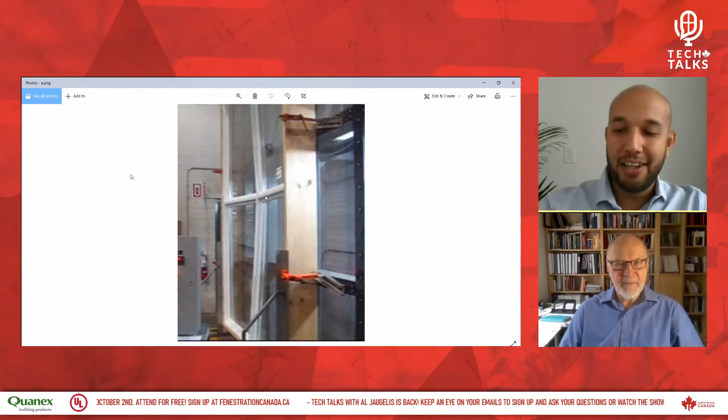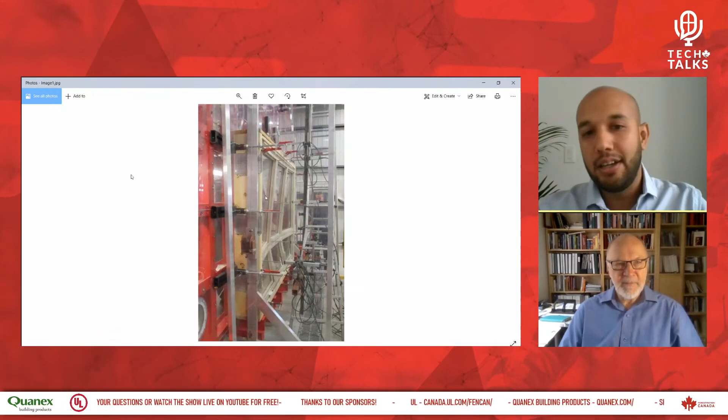So we'll start with this combination. As you can see, the bending in the middle — if you're sitting at home and you see your window bending like that, you won't be happy, you'll actually be scared to sit at home. This is the product Dave showed last week, and as you can see, the combination has the same bending.

So Tarek, would these be reinforced or unreinforced mullions? Well, these are unreinforced mullions, and as you can see the deflection is huge. Even with reinforcement, depending on the design pressure, it changes all the time — the deflection, the type of reinforcement gives us different deflections. There's wood reinforcement, aluminum reinforcement, steel reinforcement, it depends on the manufacturer. Different steel reinforcement gives different design pressures and deflections. The majority of these are not reinforced, and that's why we see the huge deflection here.

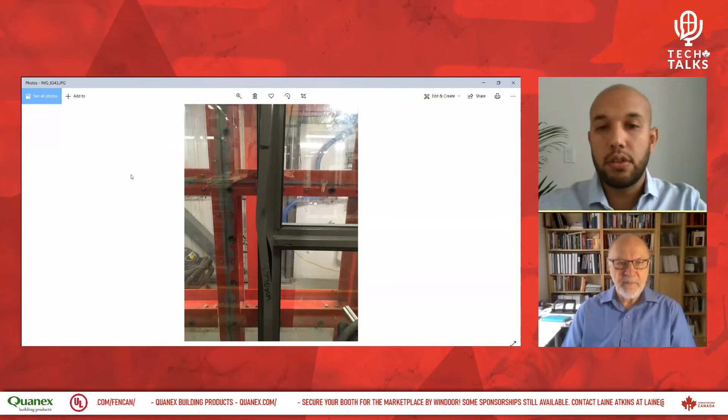Here, it wasn't the mullion specifically — it was the intersection of the horizontal mullion with the frame that caused the product to completely fail, and the frame itself to fail, which is interesting. It's not just the mullion that can fail, it's also the product itself. The frame surrounding the product can fail, since this is considered the weak area in the product.

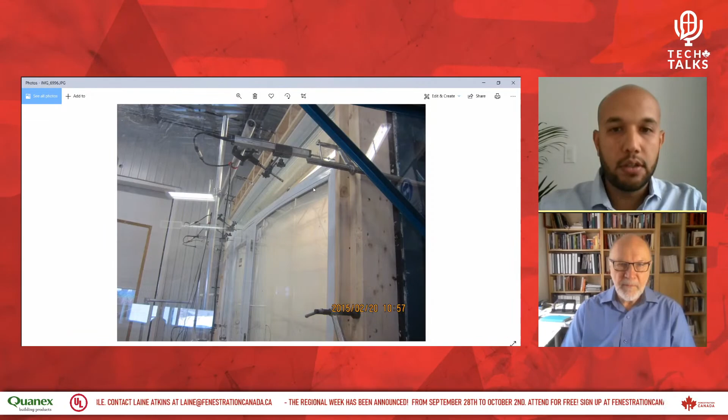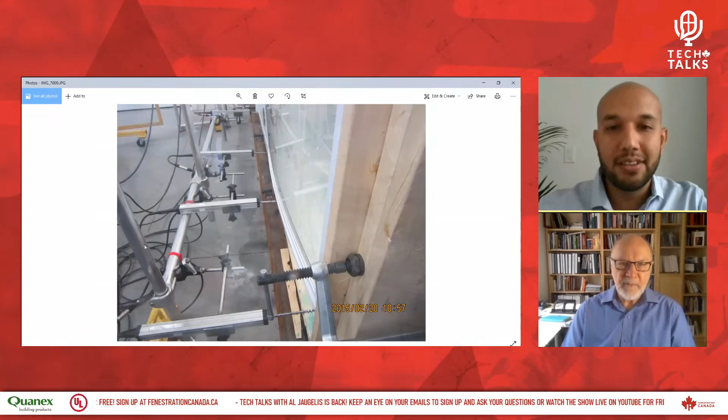This is another combination with a transom, a door, and a fixed unit, and you see big deflection there. The glass bends, everything bends, it's like a balloon. I think anyone with an engineering background looks at that window and says, that horizontal element, that big transom, is going to be a problem, right?

Yeah, well, you can always include and test it, and we'll see that when you test the biggest size, it covers the smaller size. So if we get the value for the biggest size, even if it deflects a lot like that, you can still have tables for R and LC classes. We create the CW classes table for the same product, and we can also create the R and LC class tables. So you get both.

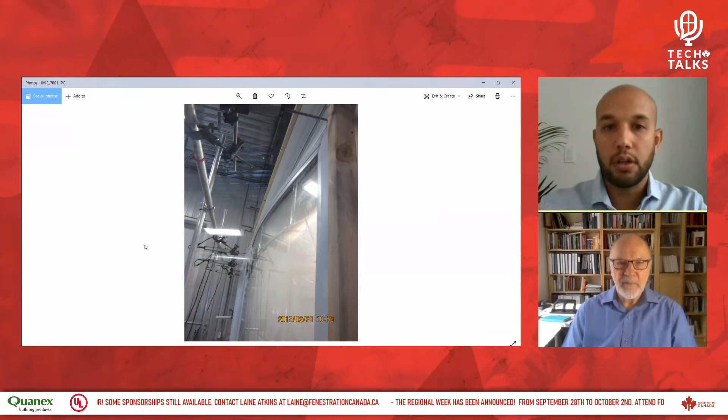Yes, you test a big product, and it has a huge deflection like that, but by testing this big product, as we can see here, it covers all the smaller sizes, which is very good since you don't have to test each and every type of product or each and every size.

With this combination, we'll cover that during the grouping for sure, but we can cover the horizontal mullion separately, and we can cover the product for the vertical mullion. So in the calculation, we take the deflection and everything from this test and transfer it as if the product was tested just with a vertical mullion. This way you don't have to test a separate product. For sure the deflection is higher when you have a transom, but you don't have to retest and do different testing. So I'll stop sharing, Stefan.

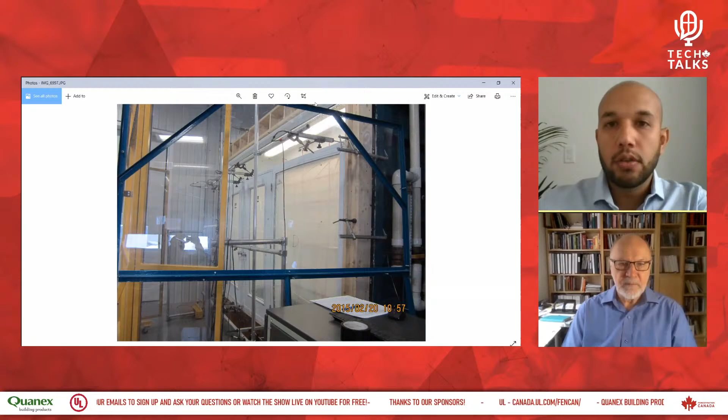So these are some of the pictures that we see a lot in the lab. There's for sure patio doors that bend a lot like that, and it's pretty interesting to see how products push the limit of the products. We usually go until failure just to make sure to know exactly the design pressure of the product, which is pretty interesting.

It's a good thing to see, and it's a nice show for the client to watch. But it's pretty annoying to clean the glass when it breaks after. That's the annoying part for sure, but it's pretty good for the client to know the limits of their products, not just stop at a specific design pressure, because you never know when the product will break. Testing shows you that for sure.

And I think that's one of the reasons that we test products, because especially with the lighter weight products, the R and LC class products that don't have much reinforcing, or sometimes no reinforcing, you can't really determine the strength of the product on the basis of engineering, right?

Yeah, there are so many indeterminates. There's the deflection of members, how the glazing beads hold the glass. If the product deflects more than L over 175, then you really don't know what the limit is, right? And you also don't know what the weak point is. So sometimes you have a window that looks like it's very strong, but it fails in a joint, for example, or a glazing bead comes off, right?

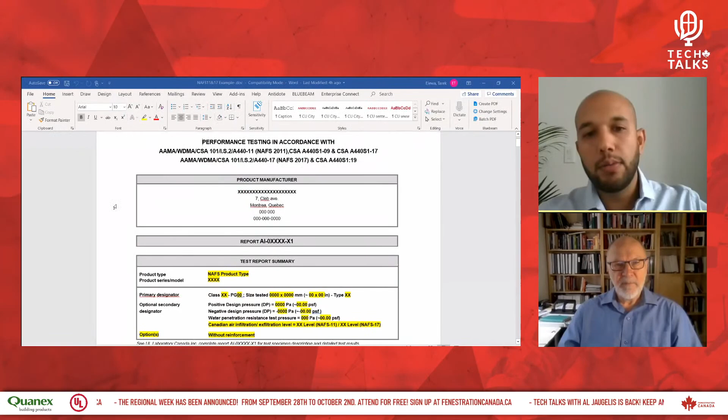Sure. First, I'll share my screen, Stefan, to show a sample report. So I created a report sample of NAFS in general. In our reports, we have the address of the manufacturer for sure, then the product type, NAFS product type, where here we have a combination. If it's an operable with a fixed, the operable always governs as a product type. If we have two operables, the biggest operable governs as a product type for NAFS.

Then we have the primary designator with the class R, LC, CW, or AW, with the PG, the size tested, and the product type. Then we have the structural level, the water level, and the air level. If there are different options with reinforcement and without reinforcement, the table is expanded, and we have two primary designators, or two options, one with reinforcement and one without reinforcement.

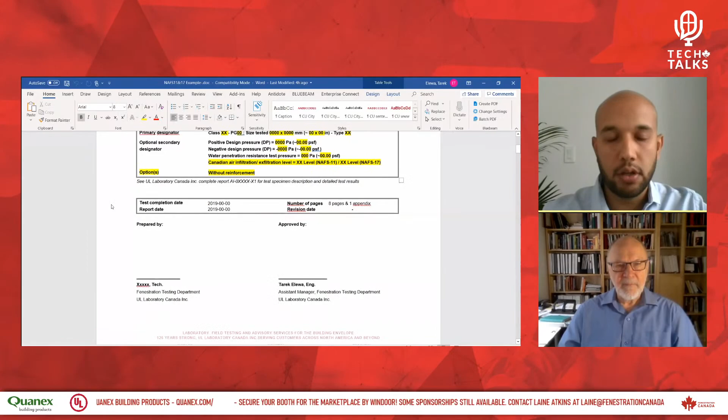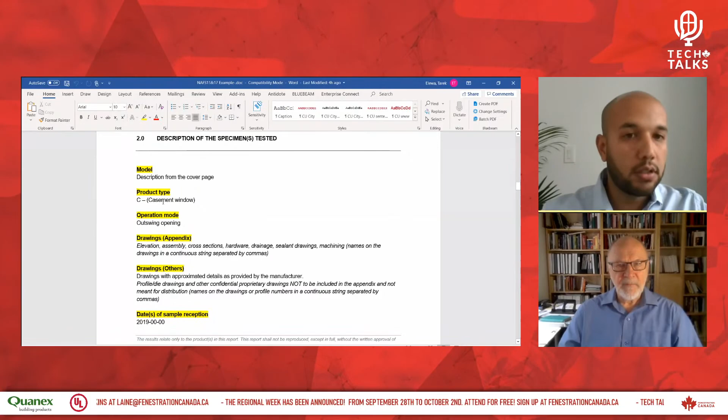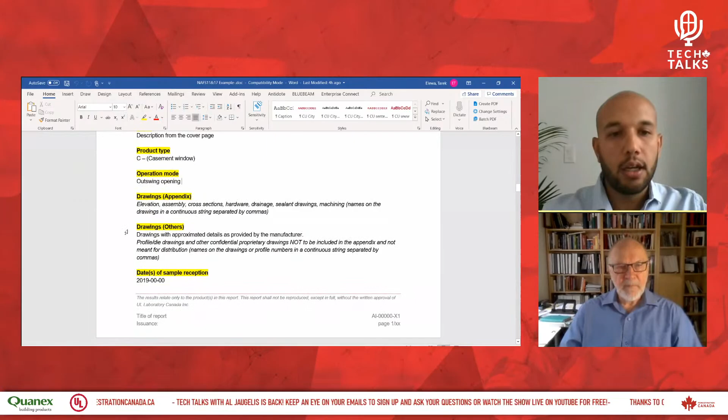When describing the specimen, we add the model. Let's say if it's a fixed and a casement, then the product type is casement. Is it operable, outswing or inswing? We add all the drawings needed. Then we note the date of sample receipt and the date of testing. If it took 1 day or 10 days of testing, we write the specific number of days.

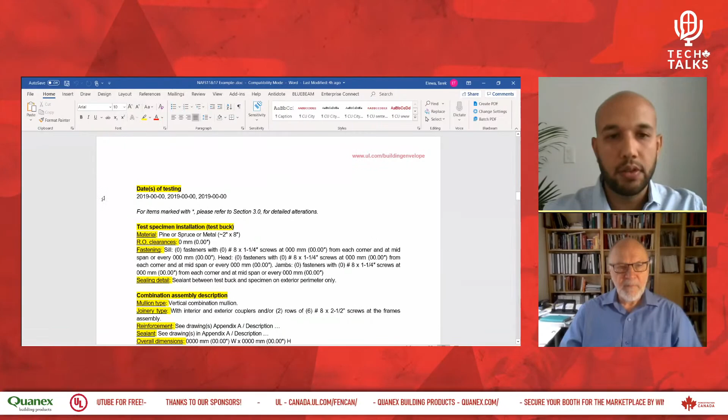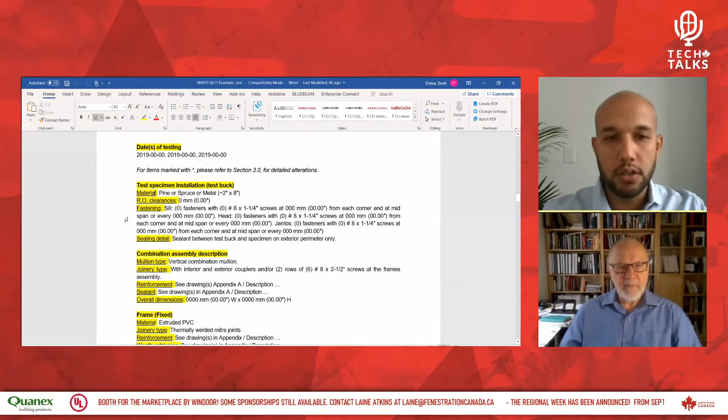Here, if there's any modification to the product, it's marked, and we identify what the changes were later. This part is very important.

It's the anchoring of the product. We have to explain exactly how the product was anchored, and it makes a huge difference. Is it anchored to a metal test buck or a wooden test buck? If it's a wooden test buck, how big was it? The gap between the product and the wooden test buck, the fasteners, how many screws, and where they are installed exactly. All this information is very, very important, since the weakest also covers the strongest.

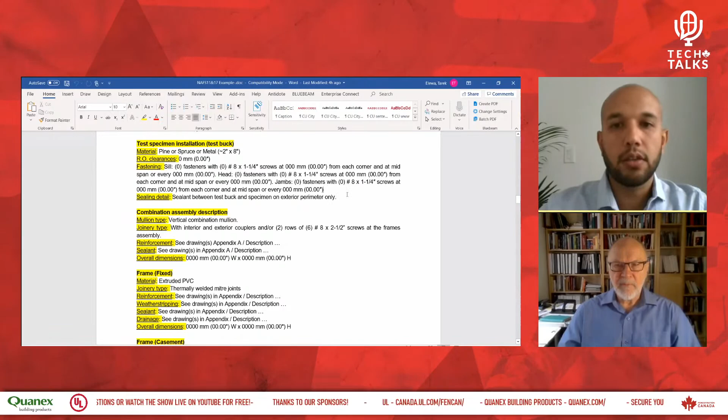For the fasteners, you can certainly do calculations if you want anchors in the future, but as a lab, we stick to what is tested. We personally cannot calculate the anchors, but we always take the weakest scenario, and this is described here.

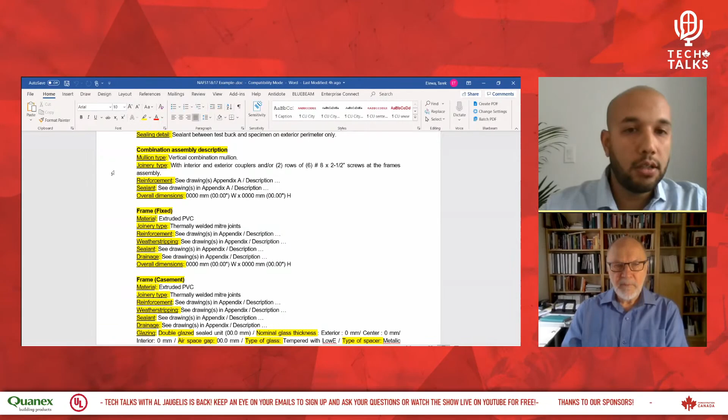Then the combination assembly description, we describe how it is combined together, if there's couplers, how many screws, attaching the product together, attaching the mullion, if there's reinforcement, what type of reinforcement. If there's drawings, that would be even better, we describe it. If there's sealant, we describe the sealant, and we put the overall dimension of the product.

After that, we describe each frame separately. I kept as our example a fixed and a casement. For the fixed, we see here there's a missing section, but it won't change much for our presentation. For a fixed, we describe the material—is it PVC, aluminum—how it's joined together, if there's reinforcement of the frame itself, the weather stripping, the sealant, the drainage, and for sure the glazing.

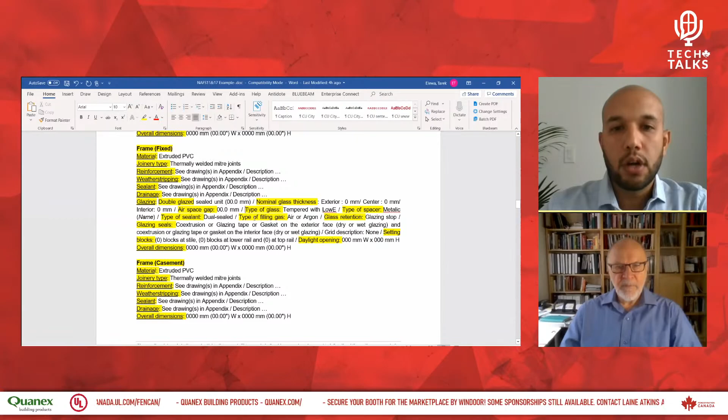So this is what I wanted to do—I'll put the glazing here, because with the fixed, we go through the glazing. The frame, the glass is always attached to the frame right away. So we describe the glazing: the thickness of the glass, the air space, the type of glass, if it's tempered or annealed, it makes a huge difference. Again, the weakest glass covers the strongest glass, and the smaller thickness covers the bigger ones. So we describe the filling of the gas, the retention, and we go through the glazing in general.

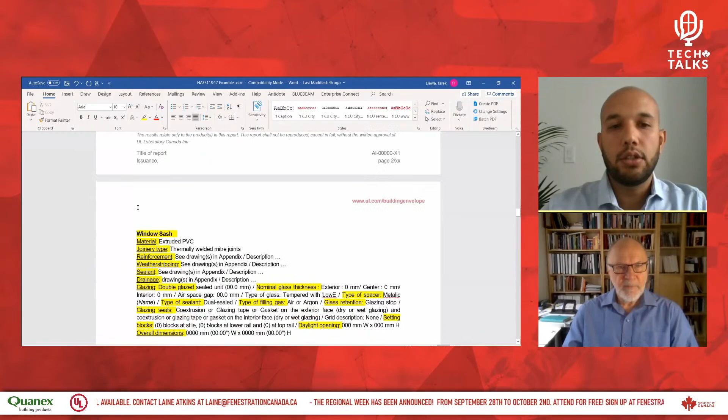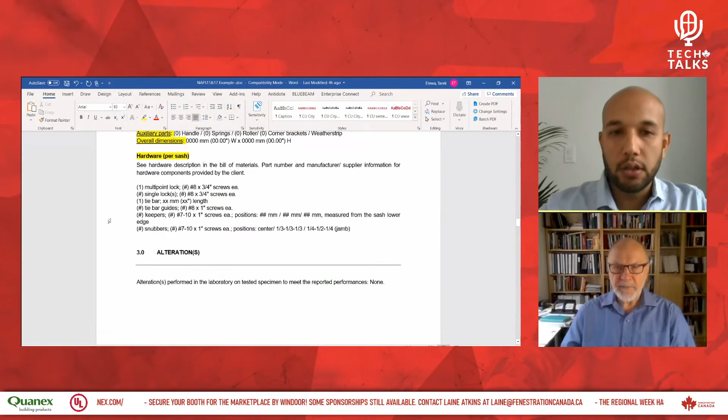We describe each frame separately and then each sash separately. The hardware is very important for each product—where the hardware is located, what type of hardware is used, the manufacturer, and the series of this hardware. All of this makes a huge impact on the product, so we have to describe it in detail. We usually get a bill of material with the description of all the products, their manufacturers, and the serial number of the hardware, and everything is included in the report.

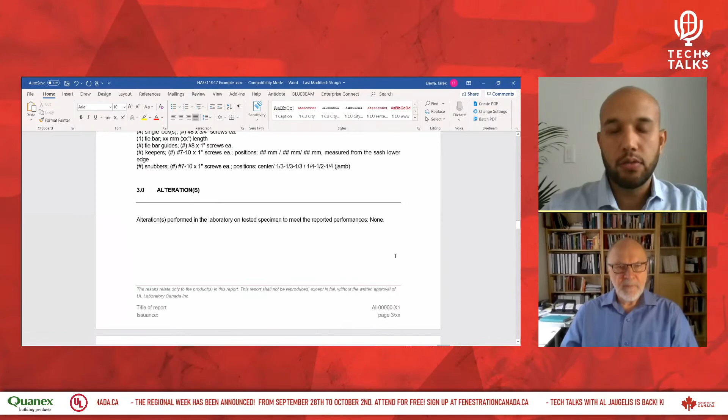As I mentioned, the alteration section—we usually write down if keepers were changed, sealant was added, and everything is mentioned there. Then we come to the results.

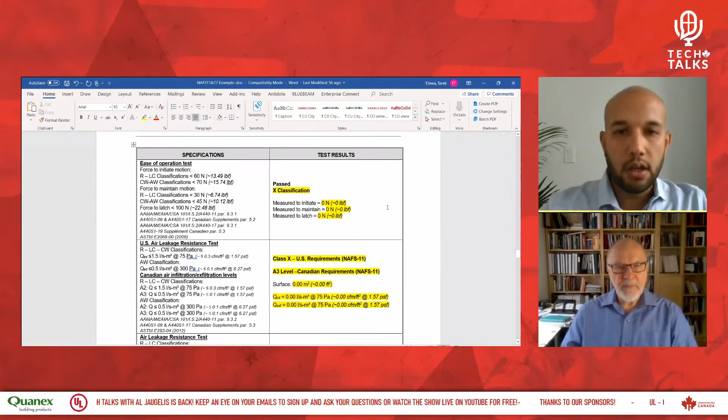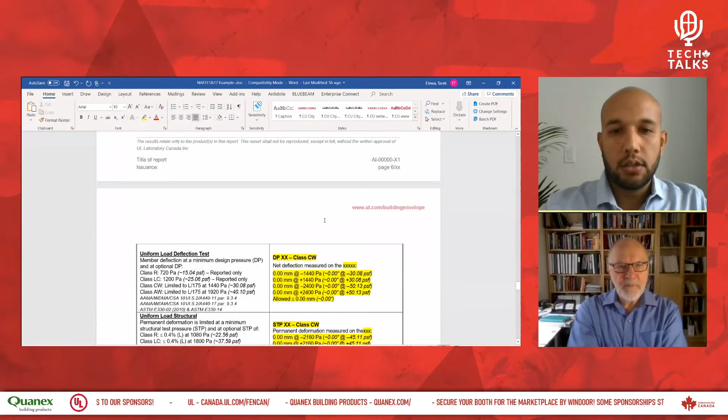We add the air, water, and structural test results, and the auxiliary tests afterwards. The reason is that any combination is covered through this report—usually we don't repeat the auxiliary tests, like forced entry, since those products are tested separately, unless the combination being tested is bigger. In that case, we have to redo the auxiliary test. But the majority of the time, when the client tests the single product or the product separately, they know their biggest size is X by Y, so the assembly won't be bigger than that—it's usually the same size or smaller.

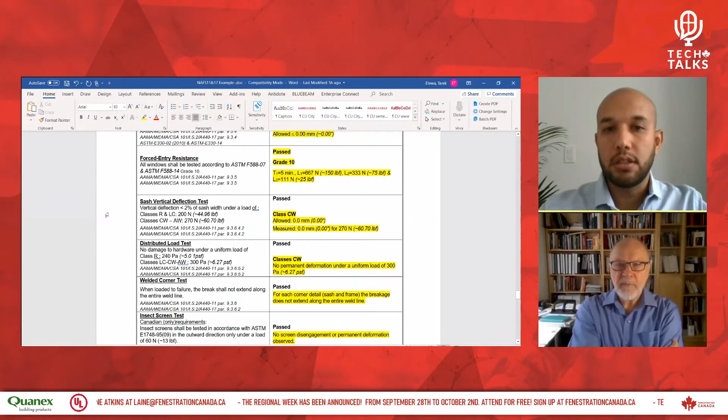Well, now I think you were also going to show us the kind of tables that are generated for the mullions as well, right? Yeah, exactly, this is a combination assembly report. Would the tables you generate for the mullions be part of the combination assembly report or a separate report? It's not a report, it's tables related to this report.

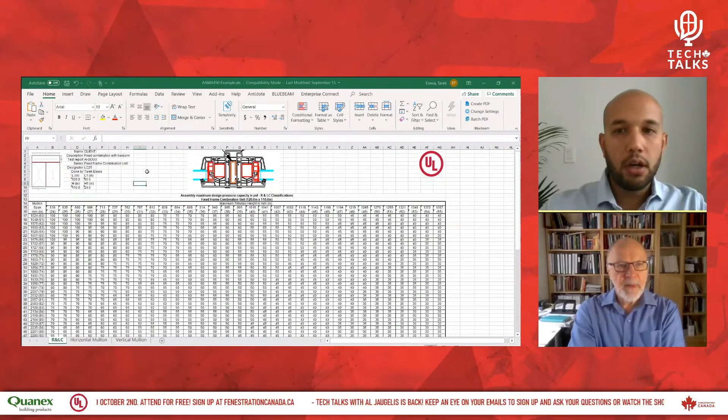I'll share an example of tables here. Are you sharing your screen again? Yeah, okay, we're good to go. Great, thank you. So here, this is an example of a table. I kept it as Excel just to be more flexible and show you, but usually this is sent as a PDF for the client.

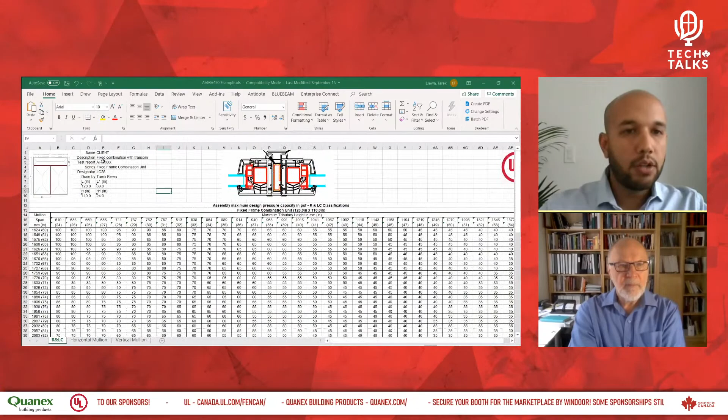I removed all the client information, but as you can see here, the test report describes which test report this table is related to, and they are added together. Here you have the Mullion spans, so this is the product tested. We have two fixed with a transom in this case. So we're generating 3 reports: one for the whole combination, one for the horizontal mullion separately, and one for the vertical mullion.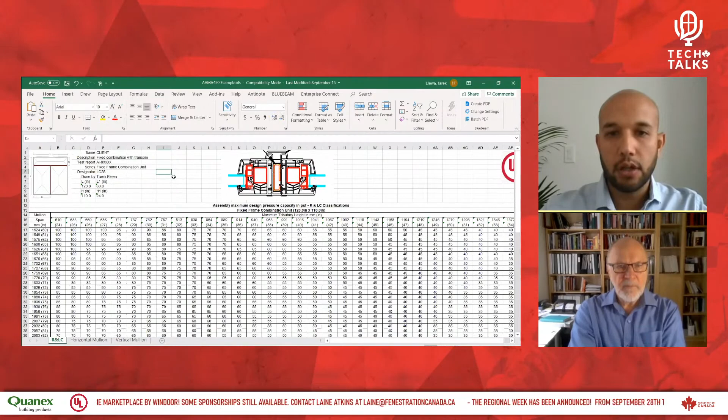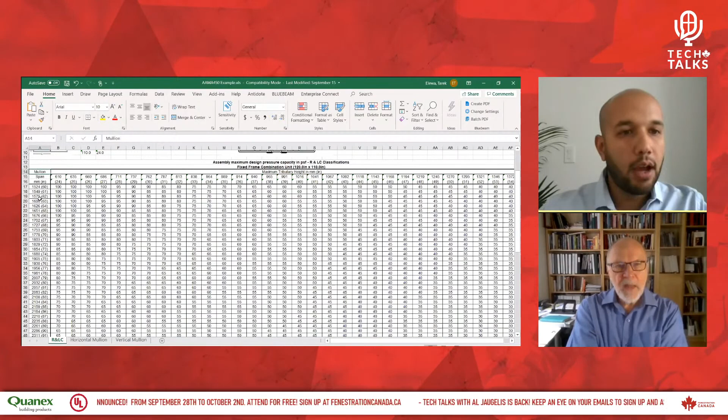With these tables, we have a screenshot of the mullion to show the reinforcement and the detail of the product, to make sure everything is explained and clear on the table. Here we have all the Mullion spans until the maximum size tested and the tributary height of the product.

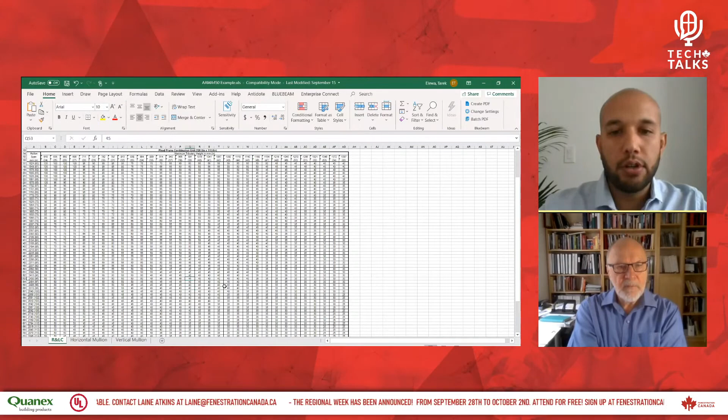So let's say if the client has a smaller product they want to cover, let's say it's an 8 feet by 8 feet. So they'll come here and they'll have the rating of 40, but when it was tested, the product did 25.

So the limit of this table is the largest size and the lowest rating. And then for any width or height in between, this table can give you what the performance grade would be at smaller sizes. So this is really useful now.

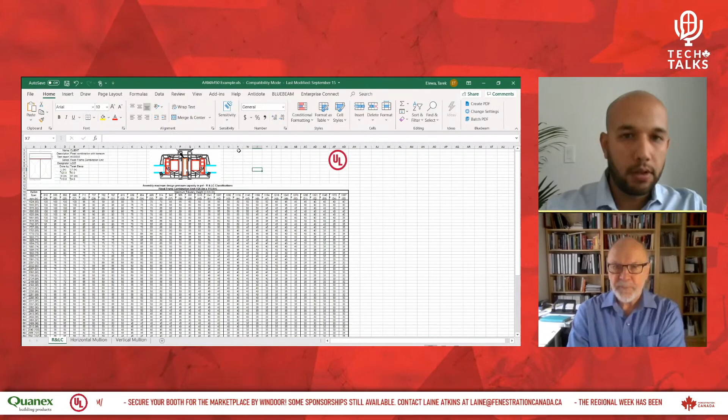Can manufacturers use these ratings for their product labels? Yeah, exactly. Using these tables, you can use them for the labeling of the product, which helps a lot. You don't need to test each and every product and each and every size. You just have to test the weakest option, and from there you can have all the other smaller sizes. We'll cover mostly all the types of product using these tables.

So I will generate a table for R and LC classification. As you can see, this is a product just R and LC, so we don't take into consideration the L over 175. But I also generate a table with the limit of L over 175 to make sure we have a table for CW classification also.

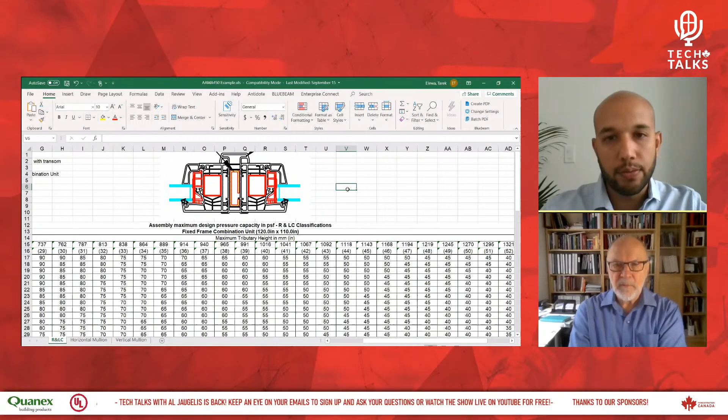So this product actually would have been tested as an R or LC, but are you saying that with a stronger reinforced mullion, it could achieve a CW? So this was just an example. I didn't have the CW table, but usually these products are tested for CW.

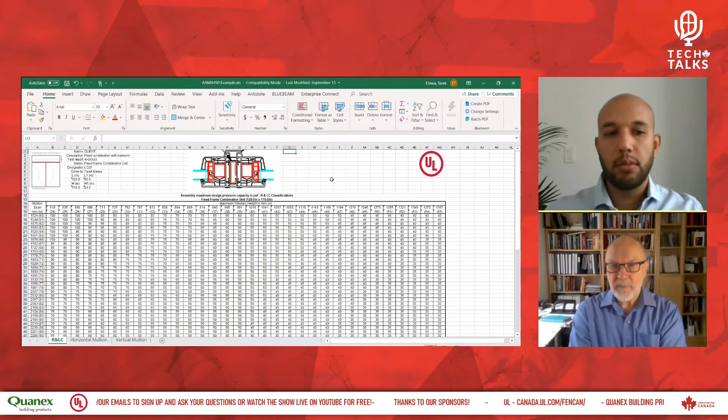And after that, we put the limit for CW, and then we continue afterwards with the data. So we have a table for CW for the client, and then we have another table for R and LC. Wow, so that's a lot of coverage, right?

Yeah. So you've tested to L over 175, and now you have tables for the CW class. You keep testing with higher deflection until failure, and now you have additional tables for the same product at R and LC classes at larger sizes than you covered under CW. Is that right? Yeah, exactly.

And we can still generate tables with the limit of CW. Let's say we tested for CW with calculation, we can still generate the table for R and LC, but you don't get the best results. Once we test it until the limit, we know the deflection exactly, and from there we generate better tables for the clients and better coverage. But again, we can still generate the R and LC classification tables, even if we stop at the CW ratings. So this is interesting.

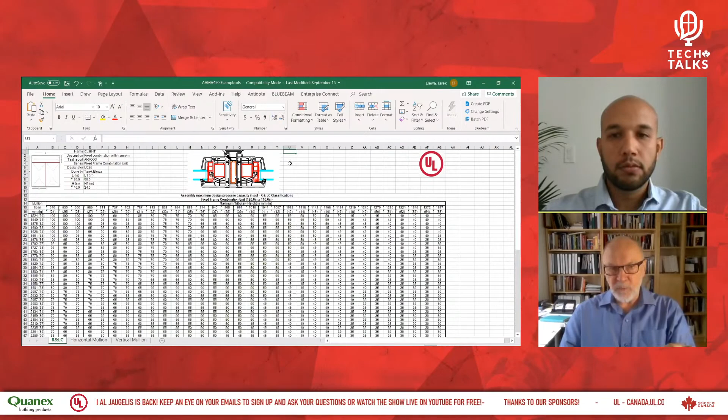So the lowest performance grade here was PG25, which would be the performance at the largest size, right? Yeah, exactly. And under NAFS, for the smaller sizes, you would still only be able to label PG25 if you didn't have the AAMA 450, correct?

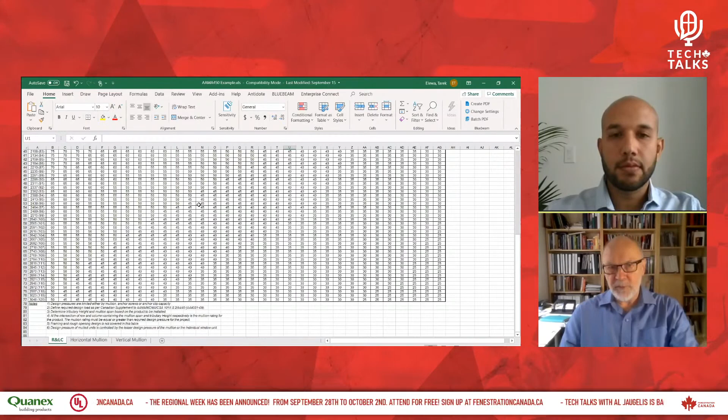Yeah, exactly. So basically, under NAFS, if we zoom up to that configuration on the left, scroll to the top of the page and zoom into that window. So under NAFS, you tested that window, you got PG25, and even if you make a smaller version of that product, you can only label it as PG25. But with the AAMA 450, you can actually report the higher performance grade it would have at smaller sizes.

Which is beneficial, which is huge, yes. Yeah, that's really the value that the AAMA 450 approach gives you. In addition to the grouping, it lets you get those higher performance ratings at the smaller sizes of the mullion.

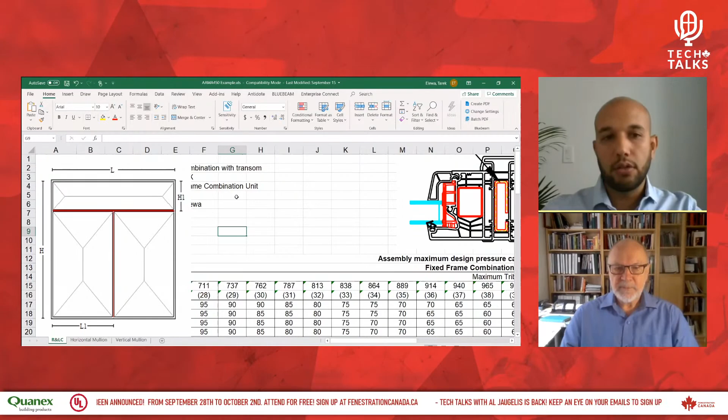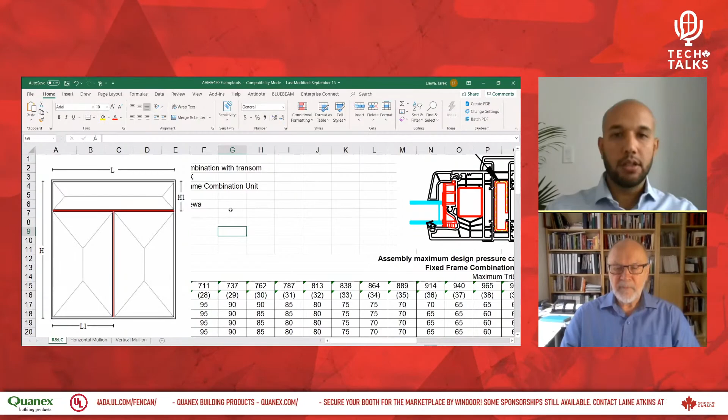That's very, very useful. So if you combine all the information together, you cover a lot of sizes, a lot of combinations, so many things without paying as much as you'd think, that you'd test each product, each combination. I completely understand it would be ridiculous to pay so much money, and this is where AAMA 450 comes and helps all manufacturers and the industry cover these combinations and different product types. So it's very beneficial for everyone.

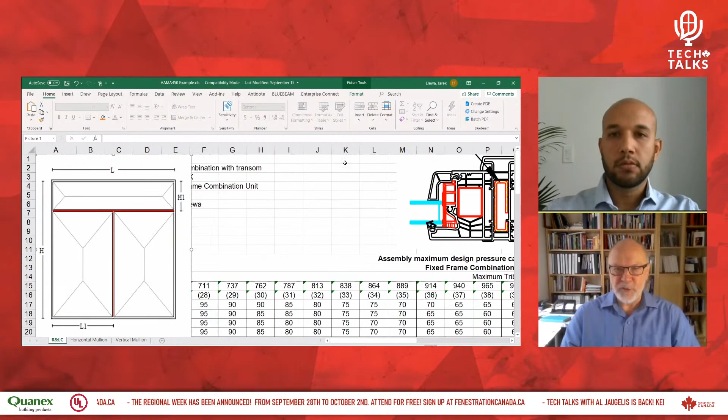So some manufacturers might be wondering, is this going to be very expensive to generate this AAMA 450 report on top of just the cost of the NAFS test? In other words, is this going to cost twice as much or three times as much as the NAFS test? Just relatively speaking, is it expensive to have this additional AAMA 450 work done? When you're testing a product at the lab, is this adding a lot of cost to the manufacturer?

This is a very good question. In reality, it doesn't cost as much as a full test. In all cases, we have to test the air-water-structural for the combination assembly, but as the tables, it costs around 20 to 25% of a full test. You get way more because you get all the dimensions possible, you get all your combinations possible, and the price is relatively so small. So it's about 20 to 25%. It's definitely a worthwhile addition for the manufacturer to consider, getting all this extra value out of the process. That's very, very exciting.

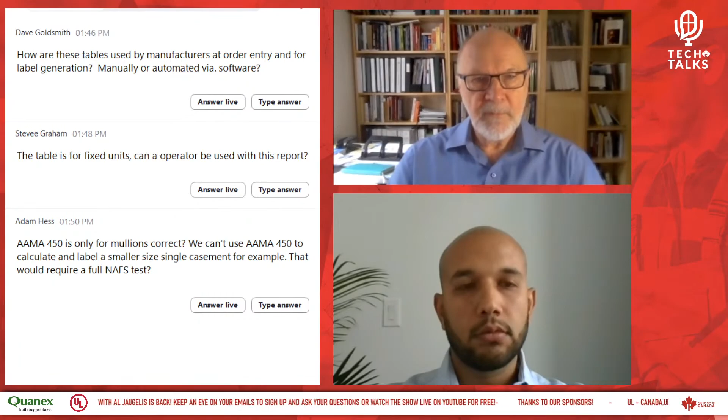Okay, so we do have a couple more questions here. Dave Goldsmith is asking, how are these tables used by manufacturers at order entry and for label generation? Is it manual or automated via software?

I'm not very familiar with the manufacturing process of labeling, so I can let Al answer this question - he's more familiar with the labeling standards. I know there are 4 options of labeling. You can label the product separately, and the mullion, you can label the whole product, but I'll let Al help me with that.

I'm sure this is a question Dave Goldsmith has done a lot of thinking about, but once the manufacturer has these ratings, clearly they can use them for labeling the product. Do you do that manually, or can you build that into your IT system? I don't see why you couldn't - it's all data that's in a kind of an Excel sheet, right? So there's probably software that does that. I think clearly, having the data gives you the basis for automating it for labeling. But I think that would depend on the size of the company. In smaller companies, there's probably more manual work involved. In larger operations, you'd probably want to automate this process, but it's really up to the manufacturer to figure out what's the most efficient way to do that.

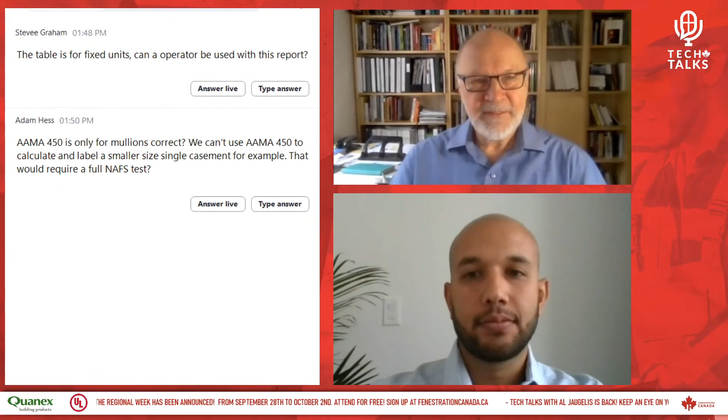Next question from Stevee Graham: the table is for fixed units, as you can see, so can an operator be used with this report? This was just an example. Different types of products have different locking systems, and this is considered in our calculations. Where the keepers are, where the loading points of hardware are, this will be shown on the report. The example was just fixed, but each product is different, and each table will picture that, showing the points of hardware and load for that product.

So in other words, for the fixed product you're probably getting the highest possible rating, because fixed products usually perform better than operable at higher pressures. So if you had a fixed casement option table, you'd be limited in your design pressures by the performance of the casement product. Yeah, exactly. You can't go higher than the highest load the casement actually sustained during the test at its largest size. This is also seen when we do the structural test on the assembly. Usually the casement, or depending on the mullion, it will never go higher than what was tested as a separate casement. With the assembly it becomes even weaker sometimes, and you can have the same failure, like a keeper breaking during the single unit test, reoccurring during the assembly test. So it will never go higher than the casement test.

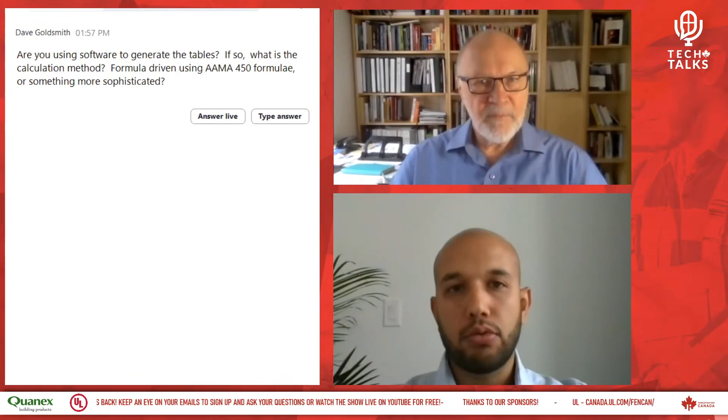Dave asks: are you using software to generate the tables? If so, what is the calculation method? Is it formula driven using AAMA 450, or something more sophisticated? No, we have our internal software that we worked on just to facilitate our work, but regular calculations for AAMA 450, even at the beginning, were all Excel sheet calculations. It's more complicated if you go into the standard and the specific calculations, but every engineer reading the standard in detail can generate an Excel sheet that does this calculation.

Okay, that's it. So I guess the answer to the question is that you are using the AAMA 450 formulas to... well, I guess AAMA 450 doesn't have the formulas. I think they're in another document, are they?

Yeah, when we generated the internal software, it helped a lot to facilitate and accelerate our process. At a certain time, back in the days, it was offered for the public, before UL, but now we're not allowed to sell or promote this software. So it's more for internal use, but it can always be created. Once you read the standard in detail with the formulas and understand what's behind the standard, yes, you can do these calculations.